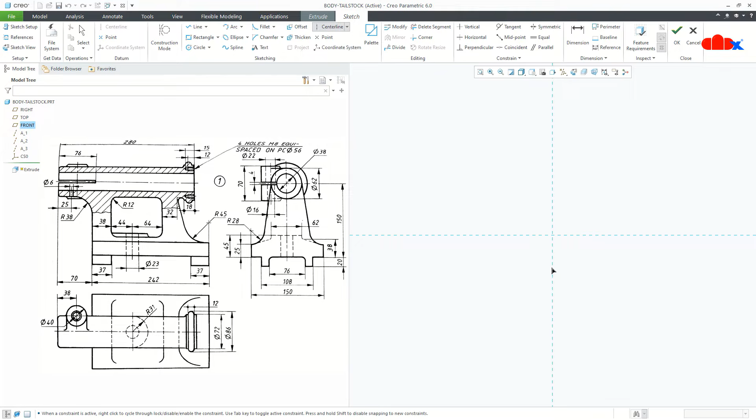To design this part, I will use add material and remove material features together at a time. I will start with this face, and for this go to extrude onto the front datum plane, normal. Now draw a center line just like this, then a line, make it symmetric. This is 76. Draw another line, starting from here, this side, this side, this side, then this side, then this side. Now this is 20.

From here till here till here, this is 108. Similarly from here till here till here, this is 150, and this is 25. Now draw another line like this and this. From here till here, this is 38, and from here till here till here, this is 62. Now draw one circle somewhere here. This is 62. From here till here, this is 150.

Now draw one line. From here, make it tangent and connect it here. Add one round from here till here. Make this point and this point vertical. This is 28. Draw another line from here till this point. Make these two segments parallel. Now select this line and make it construction. Go to delete segment, delete this segment and this segment.

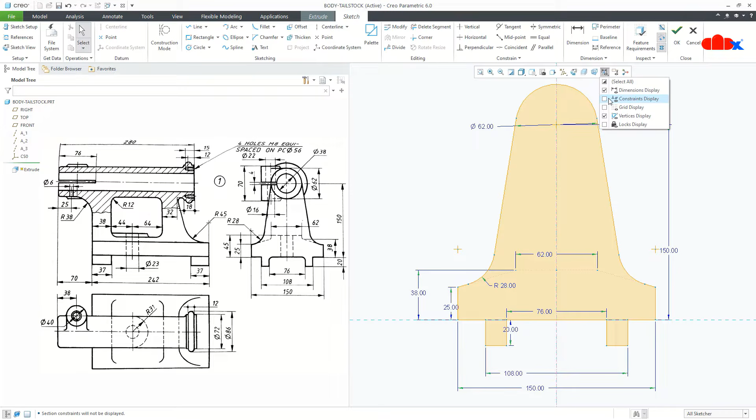Now mirror this half portion with this reference. To see it clearly, uncheck the constraint display. Now you can see it clearly. Say OK. Flip it. The total length is 242. Say OK.

The next feature is this cut. Go to extrude, switch on the datum plane, select this datum plane, normal. Go to references, select the top edge, then this edge and this side edge as references. Draw one arc from this point, this side, just like this. Then one line, starting from here, let it be tangent and connect it here. Then close it just like this.

Now draw one center line here, then a sketch point somewhere here, then go for dimension. From this point till this end, one dimension, and from this point till this end. This is 62 and this is 38 plus 44 plus 64 plus 32. Go to delete segment and delete this segment. Now this is 45.

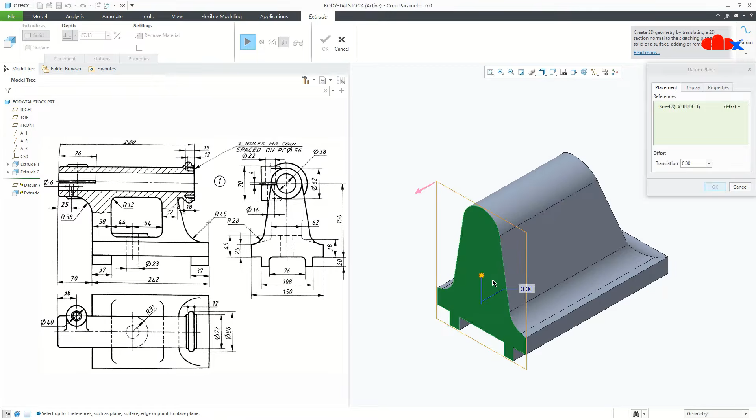The next feature is this center cut, and for this go to extrude, create a new datum plane, select this surface, drag it this side up to 38. So it is this value. Now you can see that your sketching plane is 38 away from the surface. Project this and this curve. This also you project.

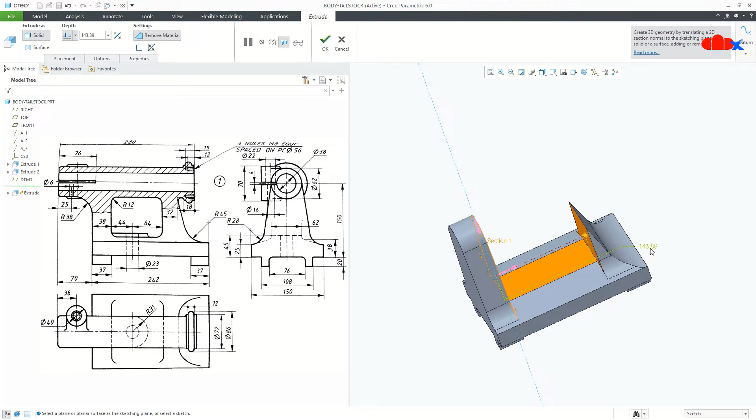Draw one line from this point, this side, and then this side. One more time, from this point, this side and this side. Now the dimension: from here till here, this is 62. Go to delete segment and remove this side segment and this side segment. Now it is a closed sketch. Say OK. Flip the direction. This is 44 plus 64. Now I will just add a center axis.

So the next feature is this feature, and for this I will go to revolve. I will switch on the datum plane and select this datum plane. Take the reference of this center line.

Draw a center line, then a rectangle, start from this side, go till this end, then again go for reference and select this top edge. Now using this option, move this line to this reference.

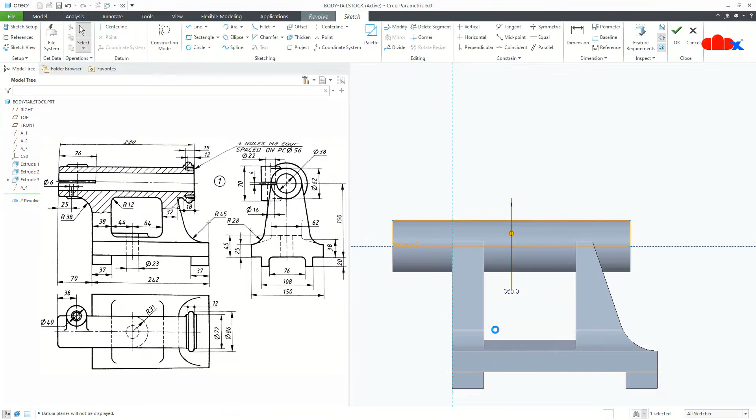Now this is 70 and this is 280. Say OK, and OK.

One more time revolve, placement, define, use previous to select the previous sketching plane. Go to reference, select the center line, then this edge and this side edge.

Now draw the center line, then line, start from here, this side, one circle here.

Now this is 18, this is 12, and this will be 9. Draw a line from here this side, and then from here this side, and from here this side.

Now go for delete segment, remove this segment and this segment. Now from here till here, this is 72 and this is 86.

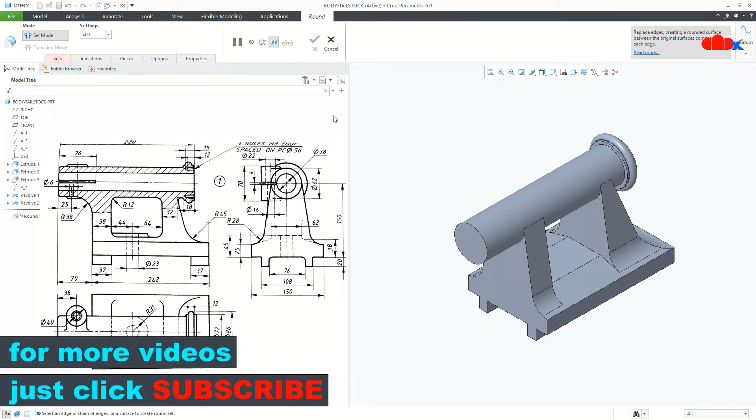So this is done. Now the round, select this edge, this is 38 and say OK.

One more round, this one and this one, this is 12, select this and this. Similarly this side.

So the next feature will be this feature, which is this one, here also. So go to extrude, again create a new datum plane.

From the bottom, this side it is 45, so now you can see the sketching plane.

Now draw the reference this side, draw a center line here, then the circle somewhere here.

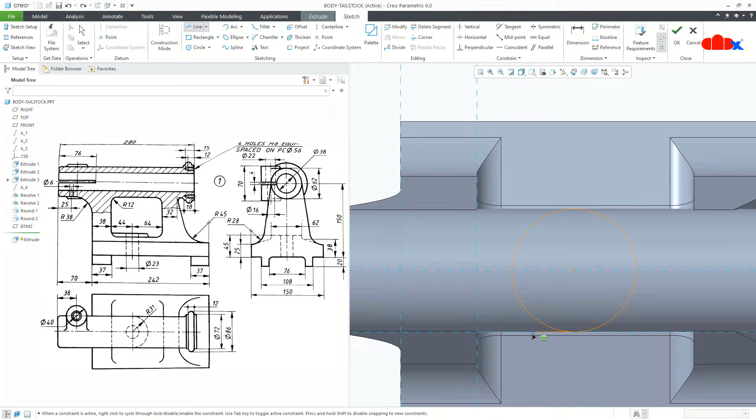Just mirror it. Now go for delete segment, now this is 44.

Now the sketch is not closed, and that is why it is showing the red mark. So use corner and select this line with this and this with this line. So now the sketch is closed, say OK.

Flip the direction and say to next. See the preview, say OK.

Now the next feature is this feature, which is here and here, and for this create a datum plane. From here, press and hold Ctrl key and select the center line, make it parallel.

Now go to extrude. So normal, draw a circle somewhere here. So this is 38 and this is 40.

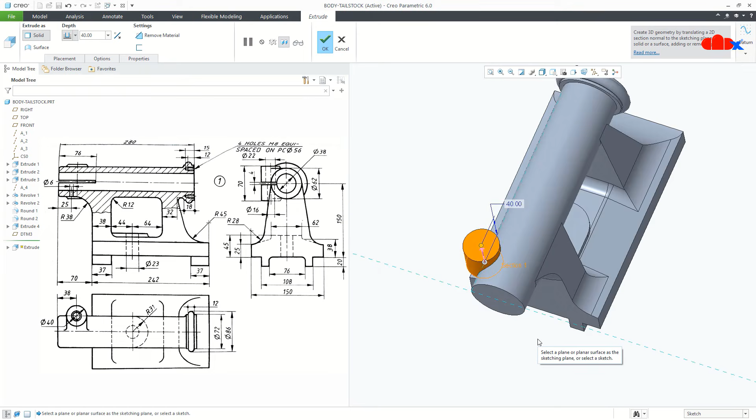Now this is 70. Now make it symmetry and say OK.

One more time extrude, placement, define, use previous, normal. Go to reference and select this circle as a reference. Now draw the line from here this side and from here till here and then this side.

Close it. Say OK. Uncheck it. Make it symmetry and this will be 62. Say OK.

Now the next feature is this cut, which is this one, and for this go to extrude, select this surface, normal, go to reference, select this circle. Now draw the circle.

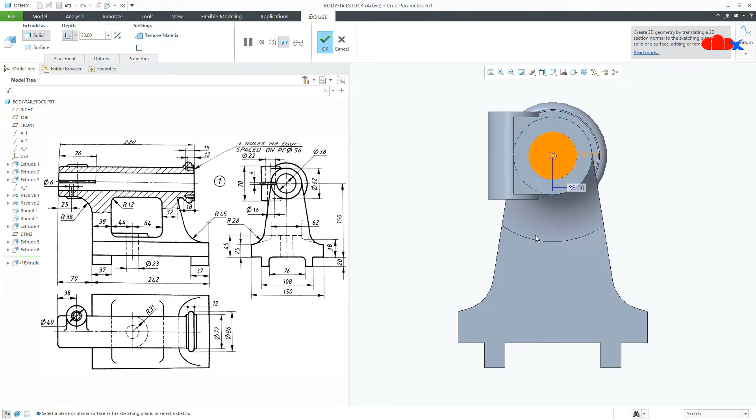Which is dia 38, say OK. Flip the direction and make it through all. Say OK.

So one more cut on the same plane. Go to reference, select this edge, draw the center line. Now draw the rectangle from here, this side.

Now this is 4. Say OK. Flip the direction. Remove material.

Now this is 76. And say OK.

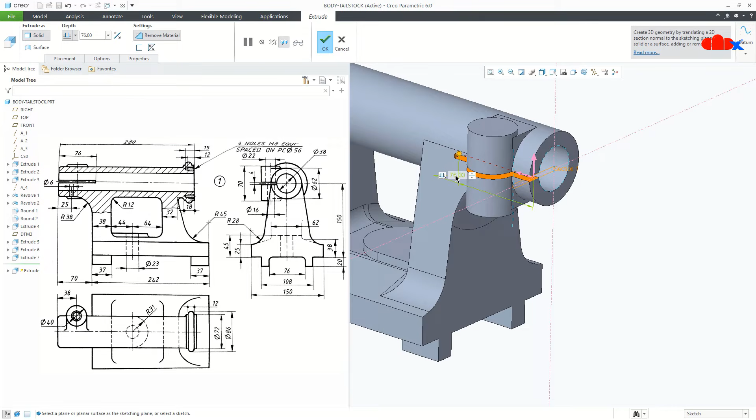Now the next feature is this feature. So go to hole, switch on your center axis, select this surface, press and hold Control key and select this axis. Now this dia is 22, which is this one.

But if you see this hole, this is not constant. The bottom side is 16 and top side is 22, 16 and 22. So for this kind of hole, go to sketch, sketcher, draw a center line, a vertical center line, then draw the rough hole profile.

So this is 22. Draw the line just like this, a rough profile of that hole.

This bottom will be 16 and this is 70 and this will be 35. Say OK.

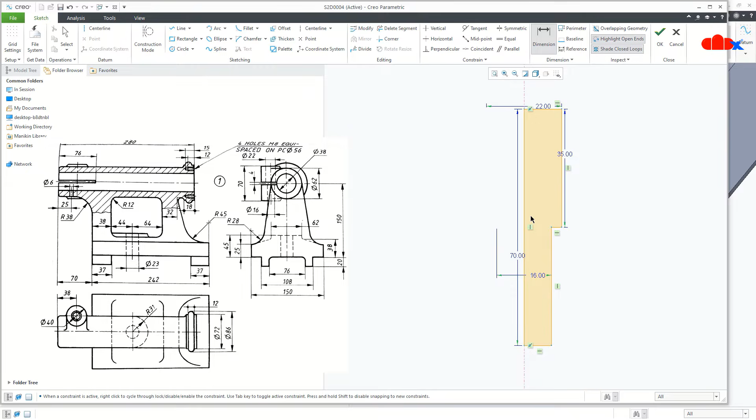So now you can see this hole. You can clearly see the small dia and big dia, which is 22 and 16. Now you say OK.

Now the next feature is this hole, and for this go to hole, switch on the datum plane, select this datum plane, now drag this handle to this surface and this handle to the center plane.

So this is 0 and this is 25. Make it minus 25.

Now the diameter is 6, and you make it to next, and say OK. So this hole is done.

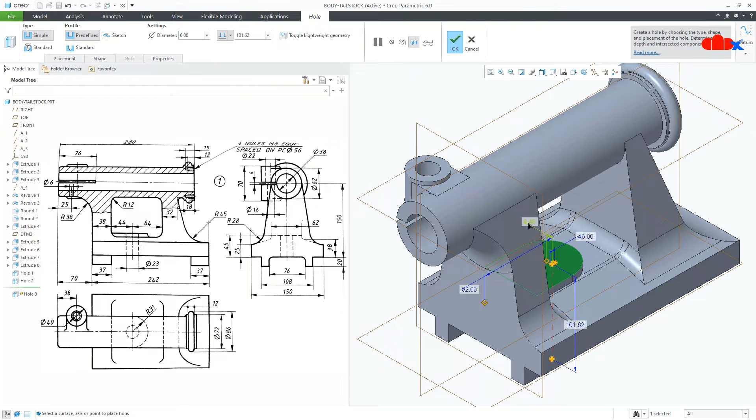Now the next feature is this hole, and for this once again go to hole, select this surface, drag this handle to this surface. So this is 38 plus 44, and this handle to this mid plane. This will be 0, and this is diameter 23. Make it to next and say OK.

Now the next feature is the side holes, screw holes. So go to hole, select this surface, switch on your axis and datum plane. Now drag this handle to this center axis, and this drag handle to the mid plane, so to this plane. Now go to placement and change it to diameter.

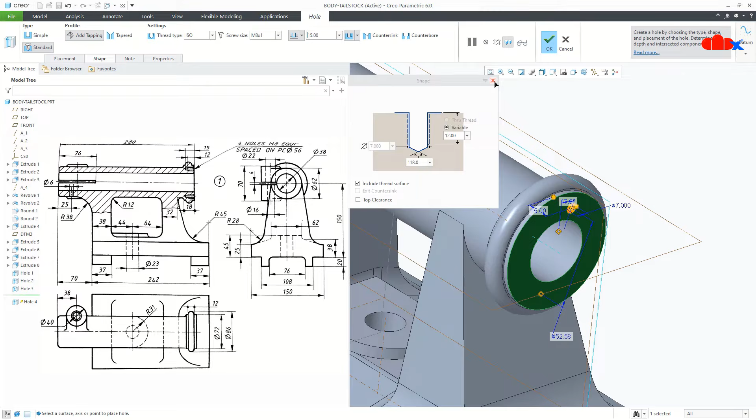So this is M8 standard hole. So go to standard, and from here select ISO, and from here you select M8. Now go to the shape. Here you have the thread length which is 12, and here you have the hole length which is 15. Now this angle will be 0, and this is the PCD, so this is 56.

So your hole is done. Now go for pattern, axis pattern, select this center axis, 4 items with 360 degrees, say OK.

Now the round, so this edge and this edge, this is 12. One more round to this edge, this is 6. Another round to this edge, this is 5.

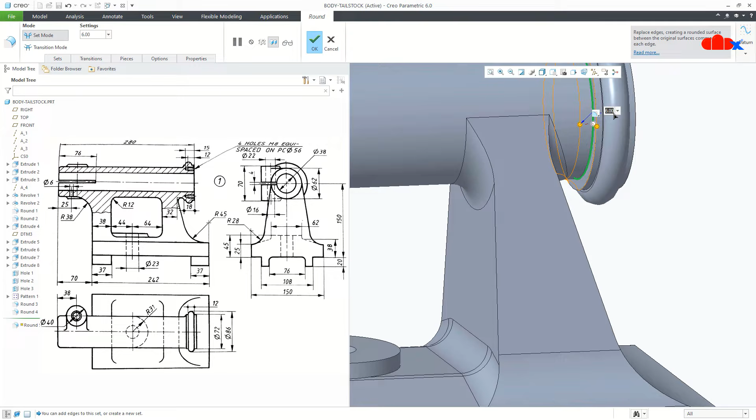One more round to this edge, this edge, this edge, and this edge. This is 6. Then one more round here, this is 3. Say OK.

Then the last round, which is this one, and this one. This is one, and your part is done.

Now go to view, sections, planar, switch on your datum planes and select this datum plane. Go to properties, make it A, and say OK. So you got section A.

Similarly, planar, select this surface, drag this side. This is 38 plus 44, 82. Make it B and say OK.

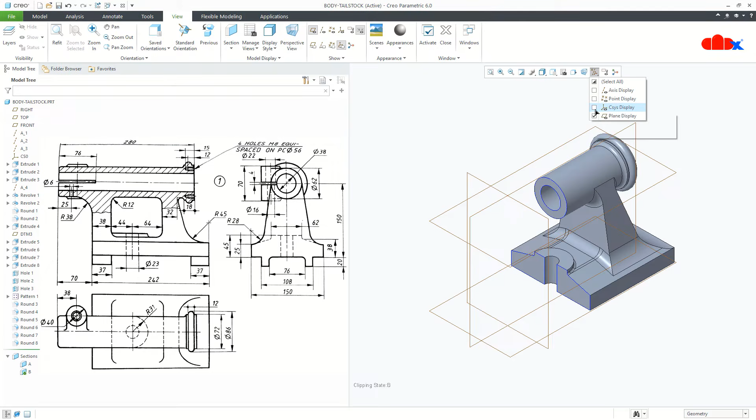So now you have section A and B. If I activate section A and make it normal, it looks like this. And if I activate B and make it normal, it looks like this. So this area is exactly similar to this.

And your part is done. So the first part is done. Now the second part, which is the feather, comes somewhere here.

Now this part has two functions here. The first function is to guide this barrel to move forward and backward, and the second function is to stop this barrel rotating on its own axis. So this is your second part, the feather. Let's do this part.

And for this, first you go to new, part, solid, assign the name, uncheck the default template, and select a metric template. So this is my metric template. In your case, you can go with this template. So I'll go with this template.

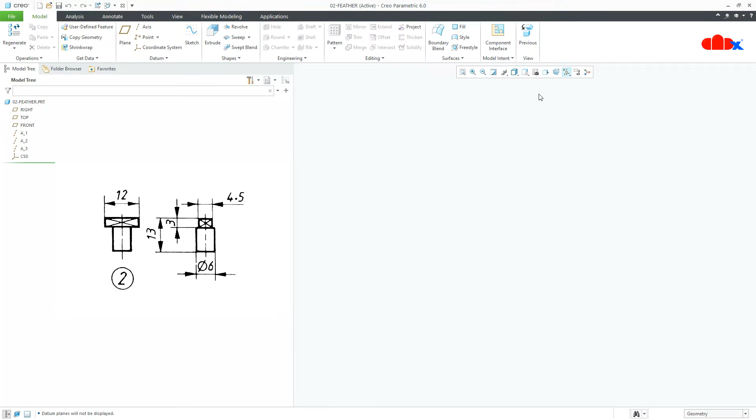Now to start this part, go to extrude onto the front datum plane, normal. Now draw a center rectangle, just like this. This is 3, and this is 12. Say OK.

Make it symmetry, and this is 4.5, and say OK.

Now one more time extrude onto the bottom surface. Just right click to shift the surface. Go to reference, switch on the datum plane, and select this mid plane.

Now draw a circle, just like this. The diameter of the circle is 6. Say OK.

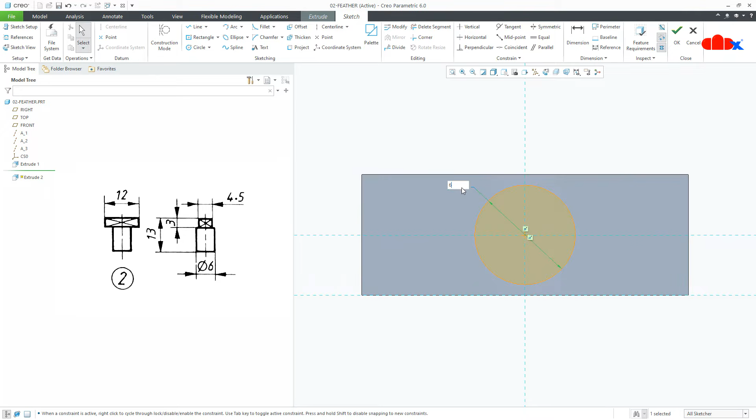Now the height is 13 from the top surface. So for that, go to 2 selected and then create a datum plane. From this top surface, drag it down till 13, and say OK. Now click here and say OK.

So now if you edit this feature, you can see that this 13 is from the top surface, and this part is done. So the second part is done.

Now the third part, and the third part is the barrel, which is this part. So these parts hold the dead center, and this part moves forward and backward using this part, which is the screw spindle. So this is your third part, the barrel. Let's do this part.

And to do this, first you go to new, part, solid, assign the name, uncheck the default template, and select a metric template. So this is my metric template. In your case, you can go with this template. So I'll go with this template.

Now to start this part, go to revolve onto the front datum plane, normal, draw a datum center line, then a rectangle, just like this. Now this is 265, and this is 38. Say OK and OK.

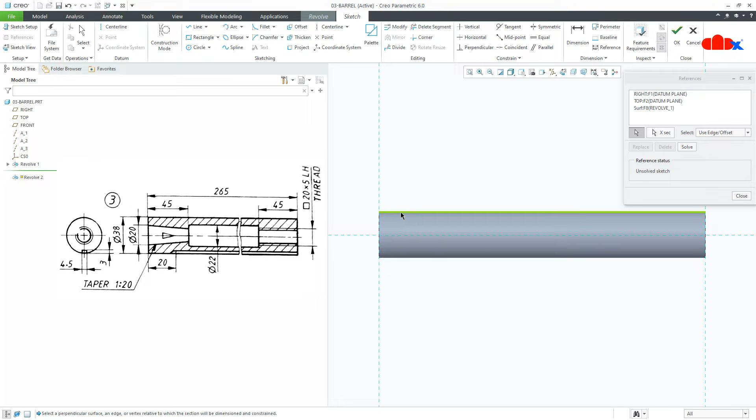One more time revolve, same plane, say use previous, normal. Go for reference, select this reference, then a datum center line, just like this. Now draw the sketch, so start from here, just like this.

Now close the sketch. Now the dimension, so this is 20, and from here till here this is 45.

This is 22, this you take 15, and from here till here this is 45.

Now this taper angle, so this is given here 1:20. So to calculate this value, just divide 45 by 20. So you will get the value. That value you minus from dia 20.

So this value will be 20 minus 2.25, so 17.75. Say OK, and say OK.

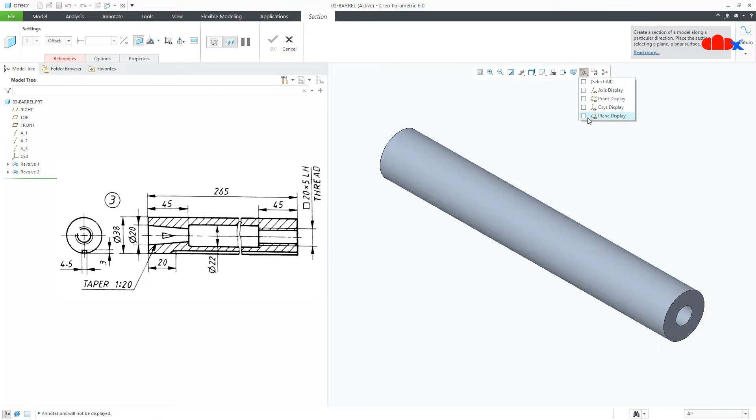Now create a section view. Go to view, section, switch on your datum plane, select this plane, rename it to section A, and say OK.

Now the next feature is this keyway, and for this go to extrude, switch on your datum plane, select this plane, now go to reference, select this reference and this reference.

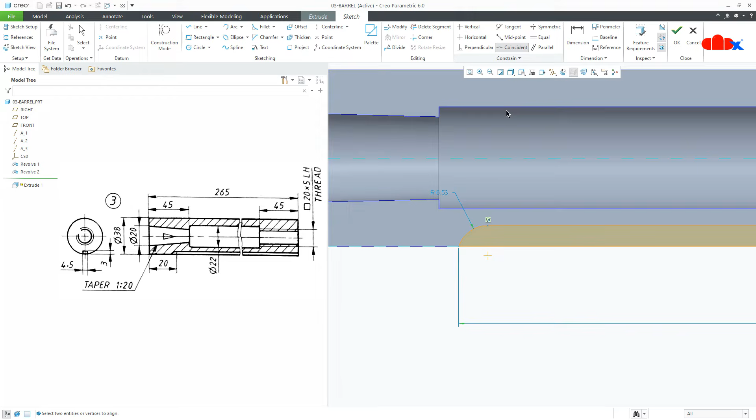Now draw the sketch. So start from here, go like this, come down, then this side, then an arc from here to this. Go for delete segment, delete this segment, then move this point to this line.

Now this gap is 3, and from here till here it is 20. Say OK. Now this is 4.5. Make it symmetry, remove material, and say OK.

Now the next feature is this thread. This is a square thread, 20 into pitch 5 LH. So go to helical sweep, reference, define, switch on your datum plane, and select this datum plane. Sketch, normal.

Now go to reference, select this reference. Draw center line, then draw the thread profile. Little extra this side and little extra this side, just like this. The value is 5 both the sides.

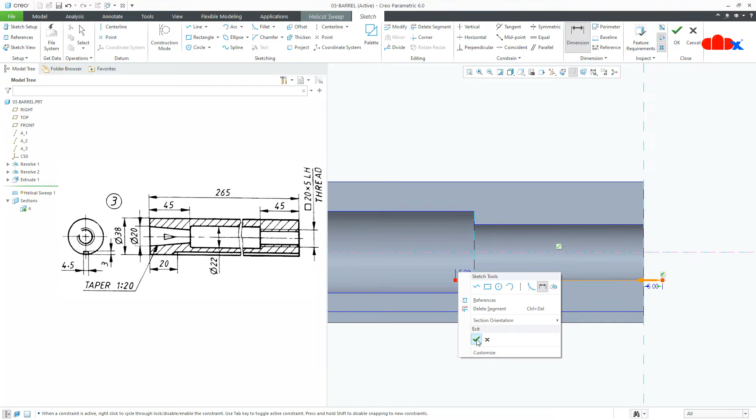And say OK. Now go to section and draw one rectangle, just like this. This value will be 2.5. Say OK. So now you are getting a thread. Go to left hand side, remove material, and the pitch is 5. Say OK, and your thread is done.

And this part is done. So the third part is done. Now the fourth part, which is screw spindle, which is this part. This part rotates using this hand wheel, and this part is having square thread here through which it moves this barrel forward and backward. So this is your fourth part, the screw spindle. So let's do this part.

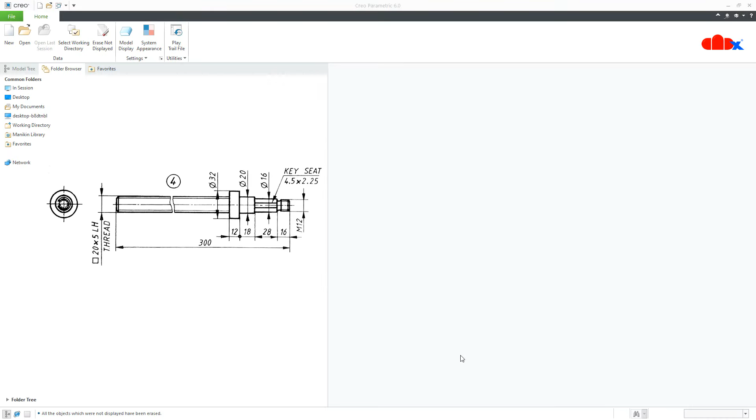And to do this, first you go to new, part, solid, assign the name, uncheck the default template and select a metric template. So this is my metric template. In your case, you can go with this template. So I'll go with this template.

Now to create this part, go to revolve onto the front datum plane, normal, draw a datum center line, then rectangle, just like this. So this is 300 minus 74, and this is 20. Say OK, and OK.

Now the next feature is the square thread. So go for helical sweep, reference, define, select this datum plane, sketch, normal, now add a center line, then reference here and here.

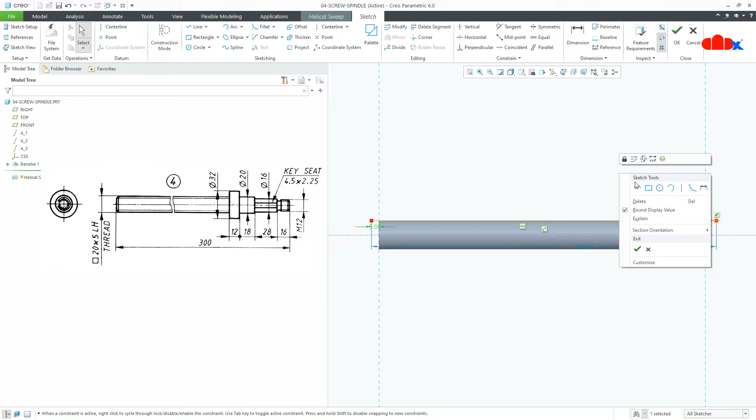Now draw the thread profile, start from somewhere here till here, little extra both sides. So this you take 5, and this side also you take 5. Say OK. Now go for section.

Draw a rectangle somewhere here, and this will be 2.5. Say OK, remove material, the pitch value is 5, and say OK. So square thread is done.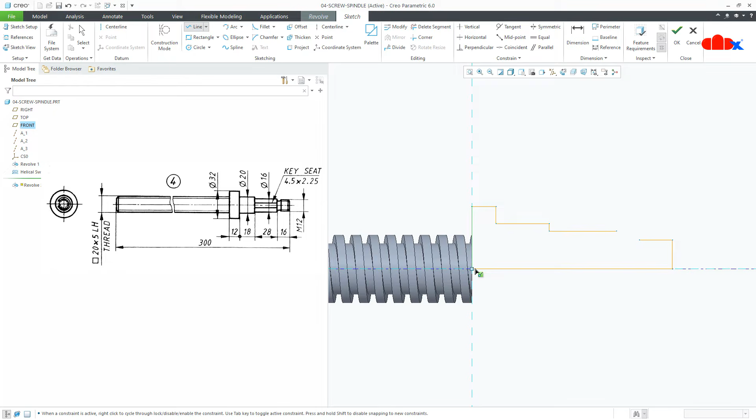Now one more time revolve, select this datum plane, normal, draw a datum center line, then sketch, start from here, just draw a rough sketch, just like this, close this, now add one arc, roughly, just like this.

Then the dimension. So this is 32, this is 20, this is 16, this is 12, this is also 12, this is 18.

Now from here till here this is 16, and this is 28. Now this you consider 16, and this is 3. Say OK. And OK.

Now the next feature is this keyway, and for this go to extrude, select this surface, normal, go to reference, select this reference, draw a center line, a vertical center line, and then a horizontal center line.

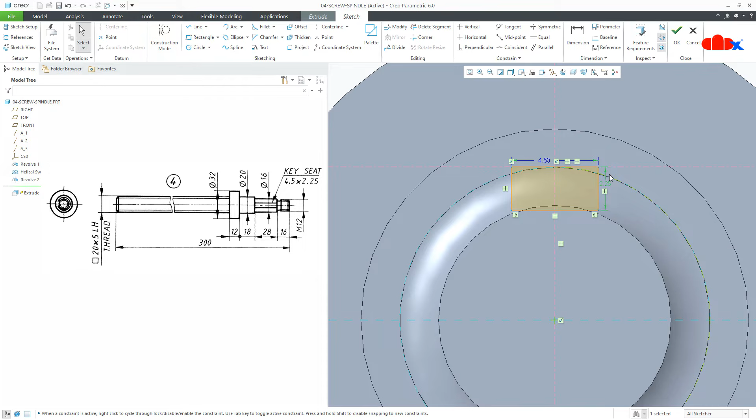Draw a rectangle, let it be symmetry. So this is 4.5, and this is 2.25. Say OK.

Go to remove material, to selected, and select this surface. OK. Now this portion is the threaded portion. So go to cosmetic thread, select this surface. Now the depth. So this is the starting point. So I'll start from here and I'll go to selected and the thread will be till here. Go to standard, select ISO and from here select M12. And say OK.

Now the last feature is the chamfer. So select this edge and this edge. The value will be 1. Say OK. And this part is done. So the fourth part is done.

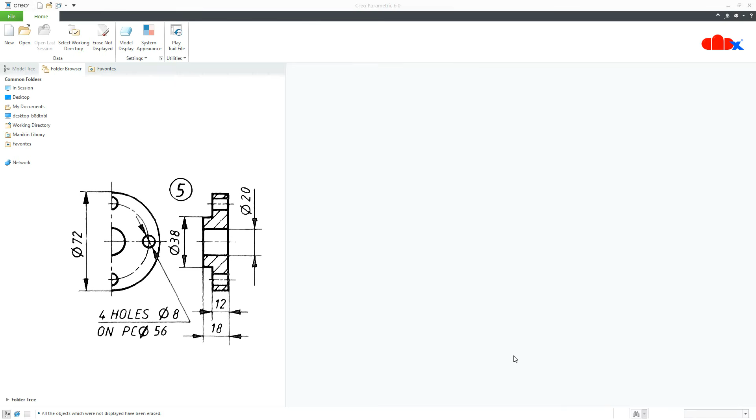Now the fifth part, which is flange, which is this part. So this part supports this spindle. So this is your fifth part, the flange. So let's do this part now. And to do this, first you go to new, part, solid, assign the name, uncheck the default template and select a metric template. So this is my metric template. In your case, you can go with this template. So I'll go with this template.

Now to create this part, go to revolve onto the front datum plane, normal, draw the datum center line, just like this, then draw the sketch, draw one line first. Now this is 72, then add a rough sketch, just like this. Go for delete segment and delete this segment.

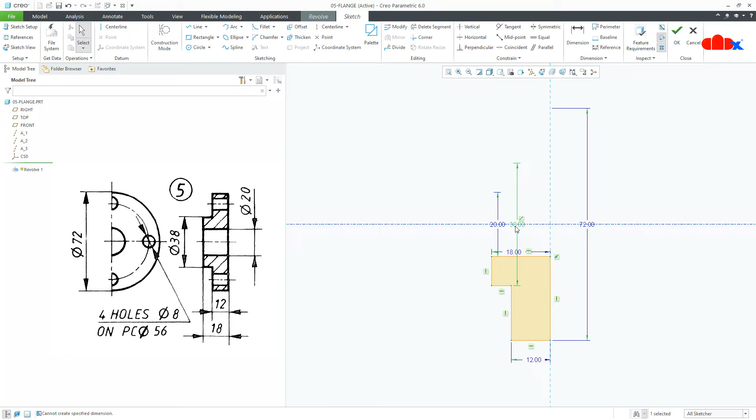Now the dimension. So this is 18 and this is 12. Now this is 20 and this is 38. Say OK and OK.

Now the next feature is these holes with dia 8. So go to hole, select this surface, switch on your datum planes and datum axis. Drag this handle to this axis and this handle to this plane. Go to placement and change it to diameter. Now this angle will be 0 and this is the PCD, which is 56. Now the dia of hole is 8 and the depth is through next. Say OK and your hole is done.

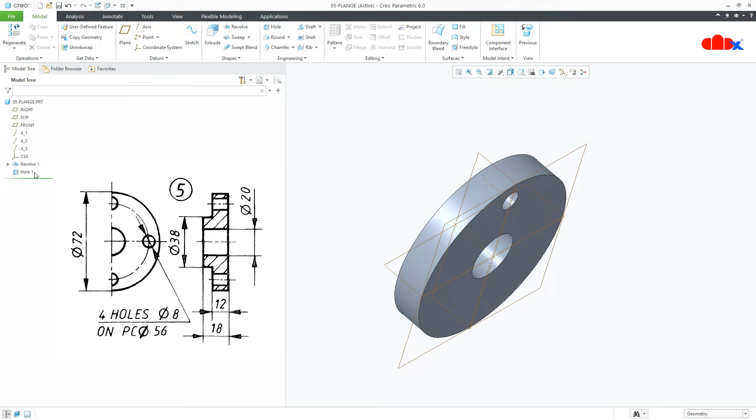Now select the hole, go for pattern, go for axis pattern, select the center axis 360 degree and say OK and your part is done. Now add a section view. So go to view, section, select this datum plane. Now rename it to section A and say OK. And this part is done. So the fifth part is done.

Now the sixth part, which is screw, which comes somewhere here. So the screw is used to fix this flange to this tailstock body. So this is your screw. So let's create this part. And to do this, first you go to new, part, solid, assign the name, uncheck the default template and select a metric template. So this is my metric template. So in your case, you can go with this template. So I'll go with this template.

Now to create this part, go to revolve onto the front datum plane, normal, draw a datum center line, just like this. Then the sketch, start from here, like this. Now this dimension will be 16. Then arc from here, this side, just like this. Now this will be 8.5. Then draw the sketch from here, this side and this side. Delete segment, delete this segment and this segment.

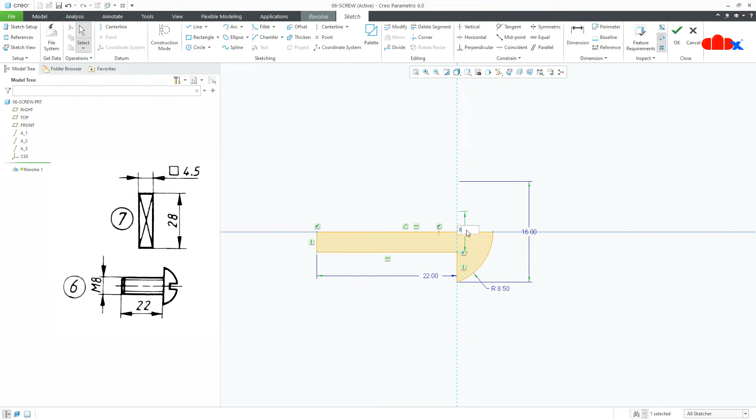Now this is 22 and this will be 8. Say OK and OK.

Now go to extrude onto the front datum plane, draw a center line, then go for reference, select this as a reference, then one more center line, then draw one rectangle, make it symmetric. Now this gap is 1.5 and this is 3.5. Say OK. Remove material, through next. Now the second direction, here also through next and say OK.

Now the last feature is chamfer. So go to chamfer, select this edge, the value is 1 and say OK. Next feature is the thread. So go to engineering, cosmetic thread and select this surface. Then go to standard and from here you select M8. Now the depth. So this is the starting surface. So my thread will start from here and go to up to selected and select this surface. Say OK. And this part is done. Now this part is done.

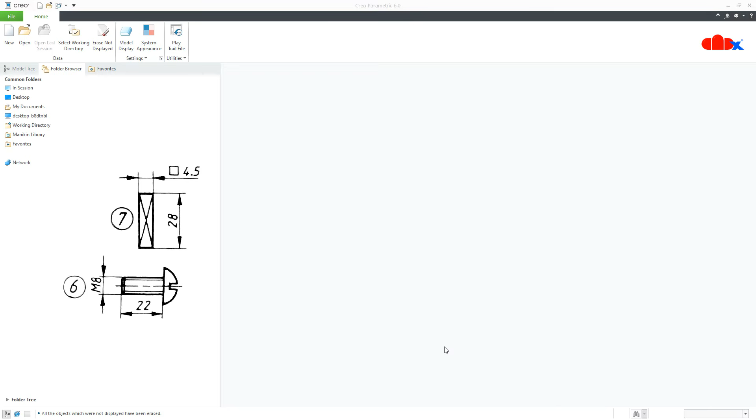Now the next part, which is feather key, which comes somewhere here. So the purpose of feather key is to engage this spindle with this hand wheel. So this is your feather key. So let's do this part. And to do this, first you go to New, Part, Solid, assign the name, uncheck the default template and select a metric template. So this is my metric template. You can go with this template. So I'll go with this template.

Now to create this part, go to Extrude, onto the top datum plane, Normal. Now draw a center rectangle, make both sides equal. Now this is 4.5. Say OK. Now the height is 28. Make it symmetry and say OK. And this part is done. So this part is done.

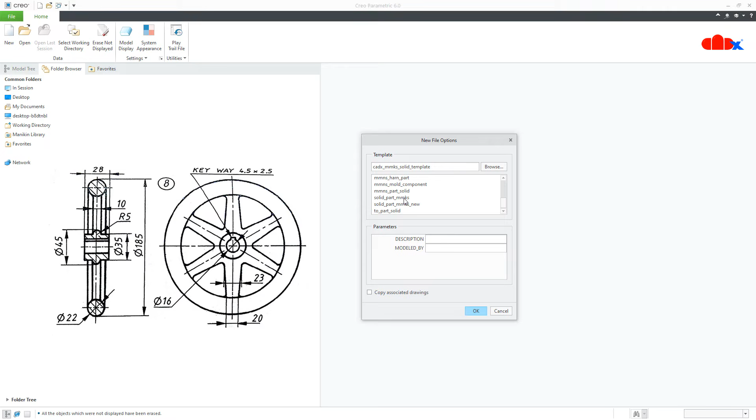Now the next part, which is hand wheel, which is this part. So the hand wheel is used to rotate this spindle, which transfers its rotational motion to the sliding motion of the barrel. So this is your hand wheel. So let's do this part now. And to do this, first you go to New, Part, Solid, assign the name, uncheck the default template and select a metric template. So this is my metric template. So in your case, you can go with this template. So I'll go with this template.

Now to create this part, first you go for revolve, onto the right datum plane, Normal, draw a datum center line, then a sketch center line, then draw one circle somewhere here. The dia of circle is 22. And from here till here, this is 185. Then draw one rectangle somewhere here. Now this is 35 and this is 28. Say OK and OK.

Now the next feature is this feature, and for this first I will draw one sketch onto the front datum plane. Draw one center line just like this, then two circles. One is smaller circle like this and another one is bigger circle like this. So this is 163. So this circle should pass in the center of the wheel, and this is 45. Then draw one line, start from here, taper till here, mirror this line, then draw one sketch point somewhere here and here, and here and here.

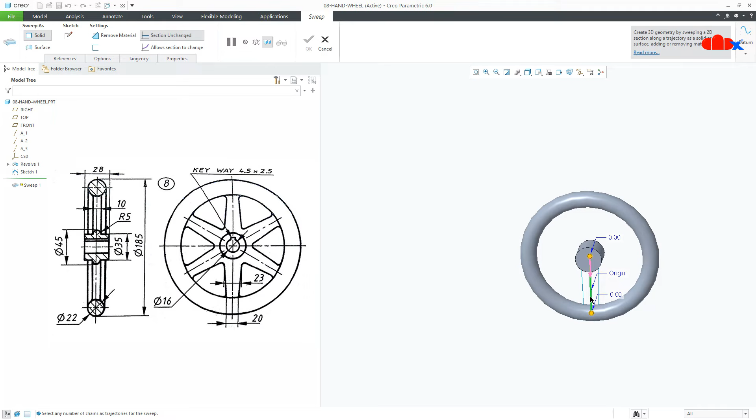Now I'll go with sweep, multiple path sweep. So I'll select the center path, then this path and this path. Then go for sketch, but always select this option, and go for sketch. Normal. Now draw the sketch. So I will draw one circle just like this and like this. Both the circles should be equal.

Now draw one line from the tangent of this to this and this to this. Now go to delete segment and delete these two segments. Now this is 5 and say OK. So now you are getting a multi-path sweep.

Now pattern this feature. Go for axis pattern. Switch on the axis and select this center axis. Total item 6 onto 360 degree and say OK.

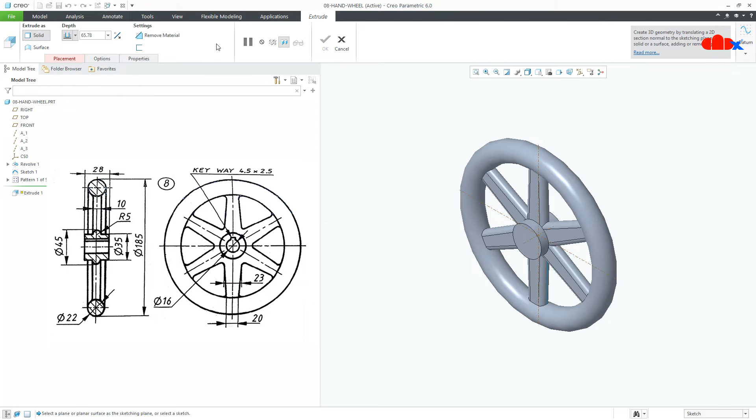Now go for extrude. Select this surface. Draw one circle. One center line. Now draw a line from here this side, then this side and this side. Make it symmetry, this point and this point with this reference. So this is 4.5 and this is 16. And from here till here this is 10.5.

Go for delete segment, delete this segment and say OK. Flip the direction and it is to next and say OK.

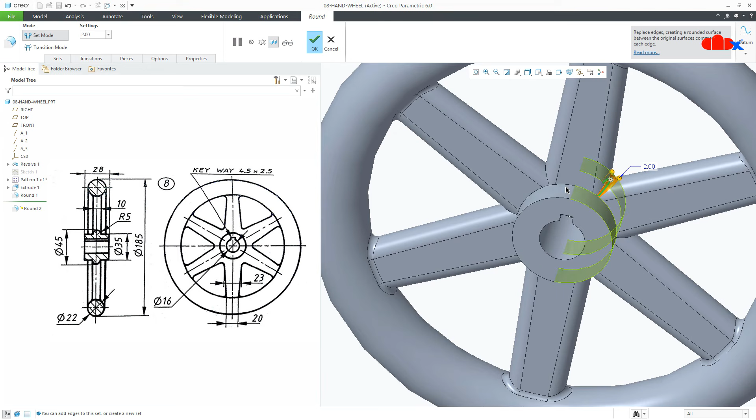Now a couple of rounds. So go to round. Select this edge, this is 2, then press and hold Ctrl key and select all these edges and say OK. Similarly, one more round to this edge, press and hold Ctrl key and select all similar edges. This is one. One more time round. Select this edge and this edge. Say OK.

Now let's create a section view. So go to view, section, select top datum plane, rename it to section A and say OK. So now you can see the section. So this is how the section will look. And this part is done. So this part is done.

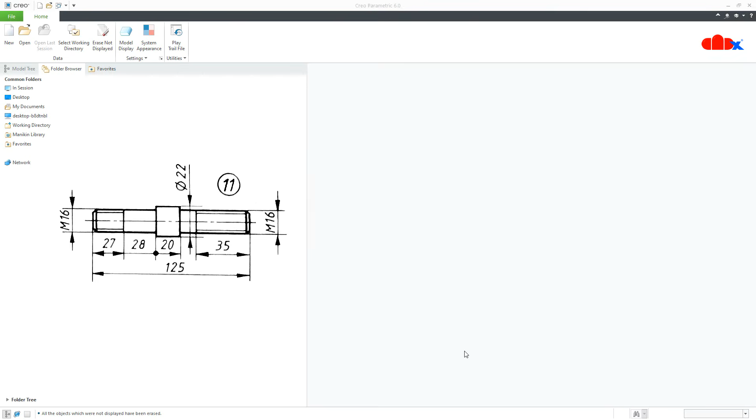Now the next part, which is stud, which comes somewhere here. So the stud, with the help of this handle, tightens the jaw of this body so that it can fix this barrel at any position. So this is your stud. So let's do this part. And to do this, first you go to new, part, solid, assign the name, uncheck the default template and select a metric template. So this is my metric template. You can go with this template. So I'll go with this template.

Now to create this part, go to revolve onto the front datum plane, normal, draw a datum center line just like this, then the sketch, start from here, this side, come down, go this side. Draw a rough sketch just like this.

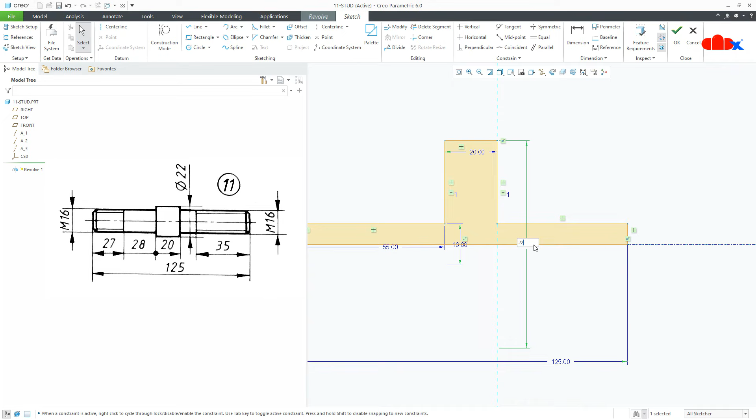Now the dimension. So this is 20, and this is 55, and from here till here this is 125. Now this is 16 and this is 22. Say OK and OK.

Now this part is having standard thread M16. So for this, go to Engineering, Cosmetic Thread, select this surface. Select Standard, and from here you select M16. Now the depth, so starting surface, so this will be my starting surface and the depth is 27.

And say OK. Similarly, one more time, go to Cosmetic Thread, this time you select this surface, Standard, ISO, M16. Now the depth, so this is starting surface, so this will be my starting surface. Now this depth is 35 and say OK.

Now the chamfer, so select this edge and this edge, and this part is done. So the stud is done. Now the next part is this handle. So this is your handle. So let's do this now.

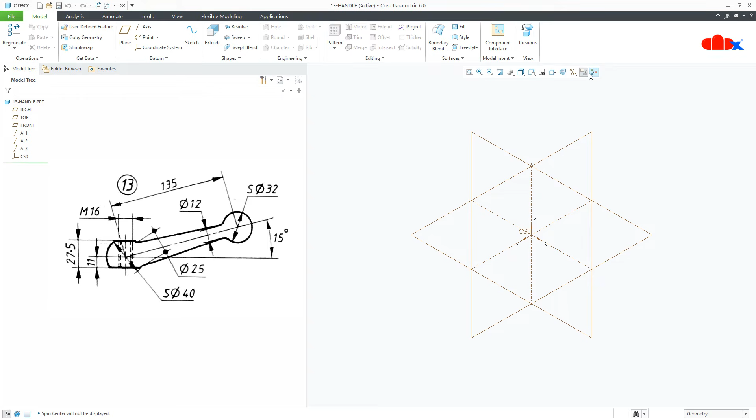Now to create this part, first you go to Revolve, onto the front datum plane, normal. Now draw a datum center line, just like this, then a circle somewhere here. The circle dia is 40. Then draw one line from here this side and from here this side. Now go for delete segment, delete this segment.

Now from here till here, this is 11, and from here till here, this is 27.5. Now close the sketch and say OK. One more time revolve onto this datum plane. Draw again a datum center line. From here, this side, the angle is 15 degree.

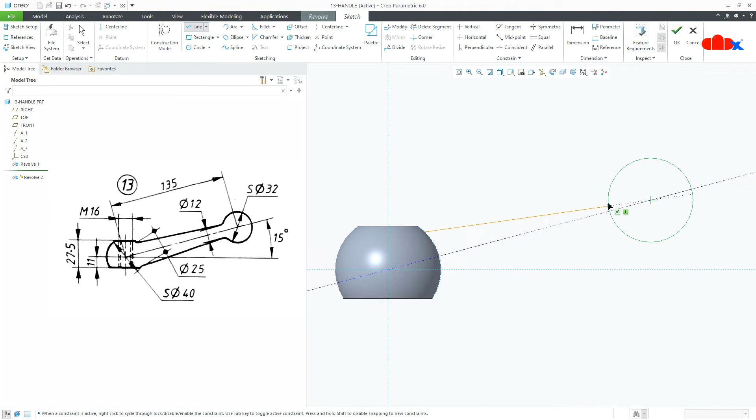Now draw a circle somewhere here. This dia is 32. Then take a reference. Draw a line from here till here. Now this is 25 and this is 12. Now draw a normal line like this and like this. Then go to delete segment, delete this segment and this segment.

Now the gap from here till here, this is 135. Say OK. And OK. Now the hole, so this is a standard hole M16. So go to hole, switch on your center axis, then select this surface, press and hold Ctrl key and select this axis. Now select standard, ISO and M16. Depth is to next and say OK.

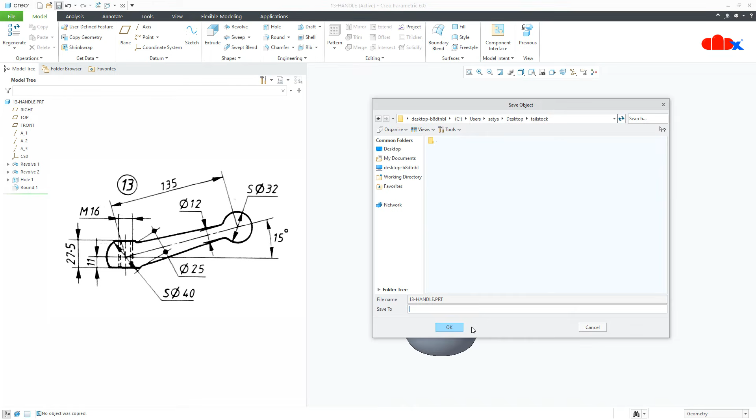Now the round, so go to round, select this edge and this edge. Now the value is 2 and say OK. And this part is done. So the handle is done. Now the next part is clamping plate, which is this plate. So this plate is used to hold this tailstock onto the bed of lathe assembly. So this is your clamping plate. So let's do this part now.

And to do this, first you go to new, part, solid, assign the name, uncheck the default template and select a metric template. So this is my metric template. You can go with this template. So I'll go with this template.

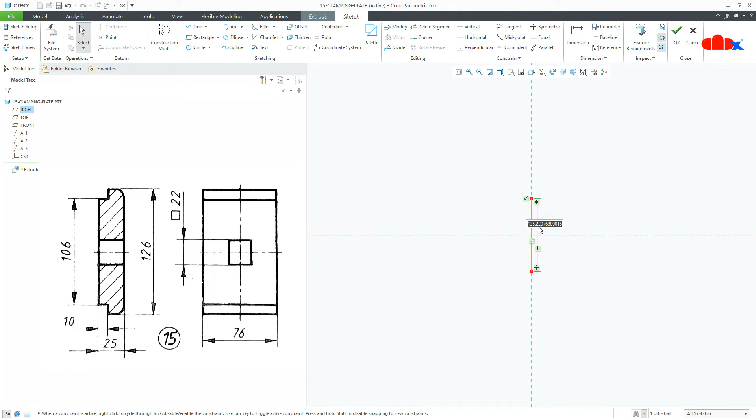Now to start this part, go to extrude, onto the right datum plane, normal, draw a center line, just like this, then a line, start from here, make it symmetry. Now this is 126, then draw the rough sketch. Start from here, this side, this side, this side and this side. Mirror these lines using this reference.

Now the dimension, so this is 106, this is 10, and from here till here this is 25. So first you delete this equal constraint, and then from here till here this will be 25. Say OK. Now the total height is 76. Make it symmetry and say OK.

Now the next feature is this feature. So go to extrude, select this surface, normal, go for reference, select right reference. Now draw a center rectangle. Just like this. Now this is 22. Say OK. Flip the direction and make it to next. Say OK.

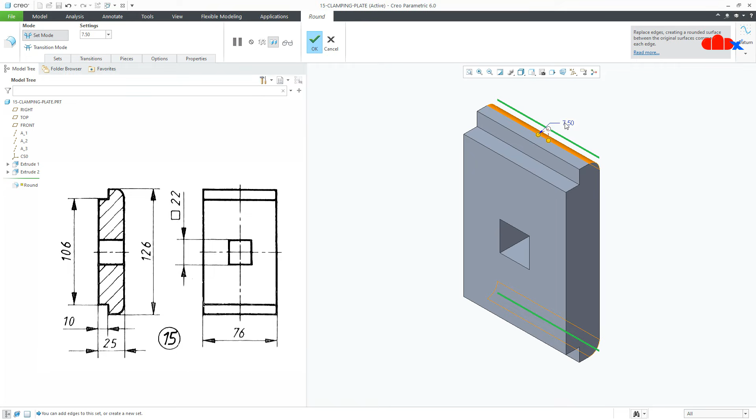Now the last feature is the round. So select this edge and this edge. The round value will be 7.5 and say OK. And this part is done. So the clamping plate is done. Now the next part is square head bolt, which is this part. So this part is used to fix the clamping plate. So this is your square head bolt. So let's do this part now.

And to do this, first you go to new, part, solid, assign the name, uncheck the default template and select a metric template. So this is my metric template. You can go with this template. So I'll go with this template.

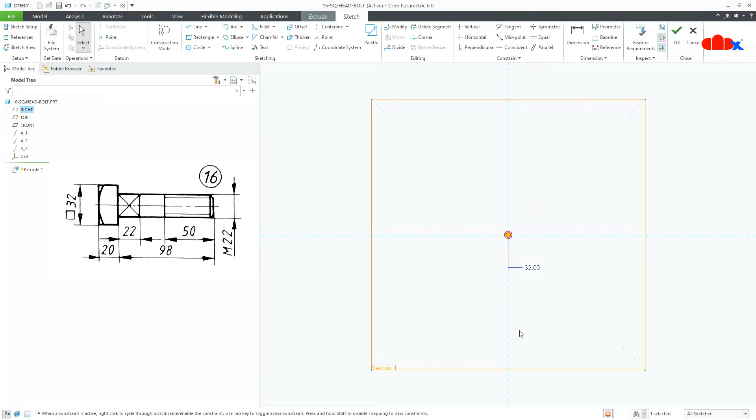So to create this part, first you go to extrude, onto the right datum plane, normal. Now draw a center rectangle, just like this. Now this is 32. Say OK. Now the thickness is 20 and say OK.

One more time extrude to this surface, normal, again center rectangle, just like this. This time it is 22. Say OK. Now this is also 22 and say OK.

Again extrude onto this surface, normal, draw a circle, just like this. Now go for reference, select this edge as a reference. Now make it tangent and say OK. Now this height is 98. Uncheck remove material and say OK.

Now the next feature is this chamfer, and for this go to revolve, switch on your datum plane, select this datum plane, normal. Now draw a datum center line. Then go for reference, draw the sketch, just like this.

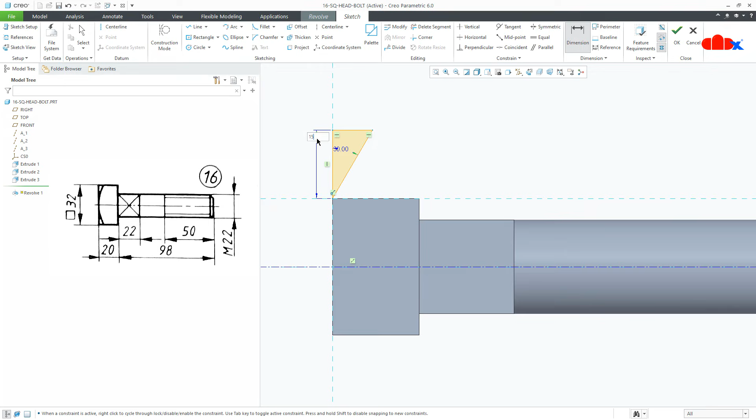Now this angle will be 30 degree and this you consider 15. Say OK. Remove material and say OK. So the chamfer is done.

Now the next feature is this thread, which is M22. So for this go to engineering, cosmetic thread and select this surface. Now go to standard, ISO, and from here you select M22. Now the depth, so this will be my starting surface. Now the depth is 50 and say OK.

Now the last feature is chamfer, so go to chamfer, select this edge, the value is 1 and say OK. So this part is done. Now the next part is dead center, which is this part. This part is used to hold the second end of the job, and this part will be inserted in this barrel. So this is your dead center. So let's do this part now.

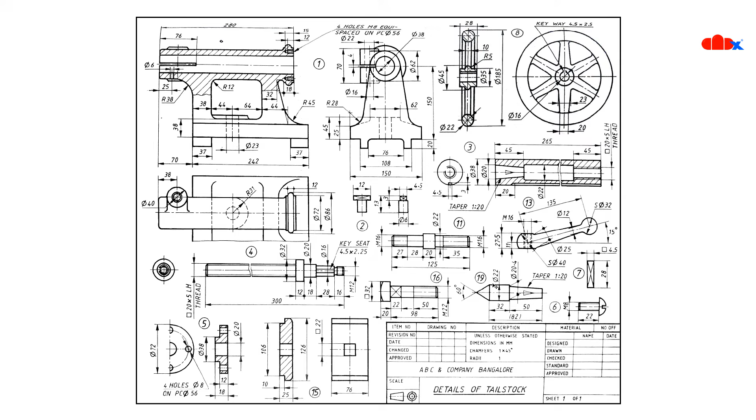And to do this, first you go to new, part, solid, assign the name, uncheck the default template and select a metric template. So this is my metric template. In your case, you can go with this template. So I'll go with this template.

Now to create this part, go to revolve, onto the front datum plane, normal, draw a datum center line, then draw the sketch. Start from here, just like this. Now this angle is 60 and this is 22. Now draw the half section, just like this.

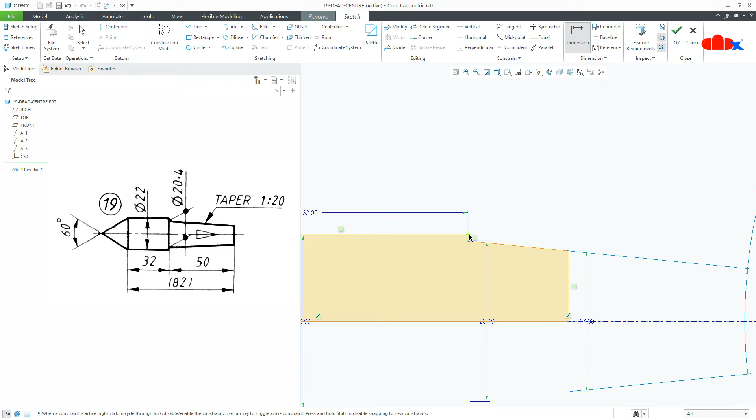Now the dimension, so this is 32 and this is 20.4 and this is 17.9, and from here till here this is 50. Now to calculate this 17.9, you need to understand this taper angle 1:20.

So to calculate 17.9, first you divide 50, which is this portion length, by 20. So you will get one value. That value you minus from 20.4, so you will get 17.9. If you divide 50 by 20, you will get 2.5, and if you minus 2.5 from 20.4, you will get 17.9. Now you say OK and OK, and the part is done.

So all the parts are done. Now at last we have some fasteners. We have three different sizes of nut and washer. These two are M12, then here you have M16, then M22. So let's do this part now.

And to do this, first you go to new, part, solid, assign the name, uncheck the default template and select a metric template. So this is my metric template. In your case, you can go with this template. So I'll go with this.

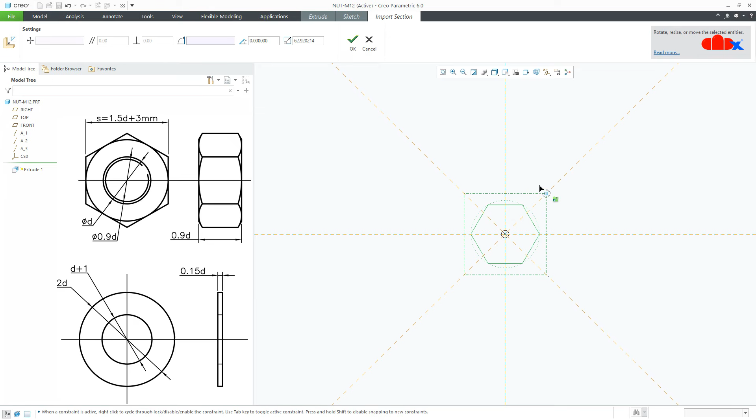Now to design these fasteners, I will follow these formulas. Here I am doing for M12, and the same procedure can be followed for the other two sizes. First you go to extrude, onto the front datum plane, normal, go to palette, 6-sided hexagon. Now move it here, rotate it, scale you make it 10 and say OK.

Now delete this dimension and take side to side dimension from here till here. For M12 it will be 21. Say OK. Now this thickness will be 10.8. Make it symmetry and say OK.

Now the chamfer, so go to revolve, select this datum plane, normal, go for reference, draw a datum center line, now draw the sketch, just like this.

This angle will be 30 degree and this I will consider 5. Say OK. Remove material and say OK. Mirror it to this datum plane.

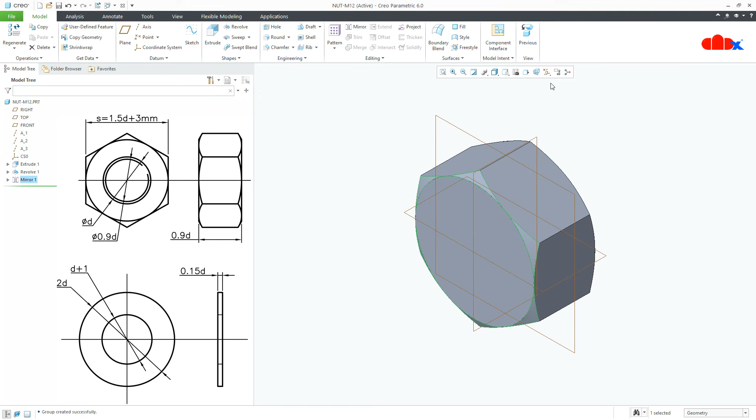Now the next feature is the hole. So switch on the datum axis. Now select this surface, press and hold Ctrl key and select this axis. Go to standard, select ISO, and then from here you select M12.

Depth you take to next and say OK. Now the last feature is chamfer. So go to chamfer, select this edge, the value is 1, and select this edge. Say OK and this part is done. So here this part is created for M12. Now the same procedure can be followed for the other two sizes.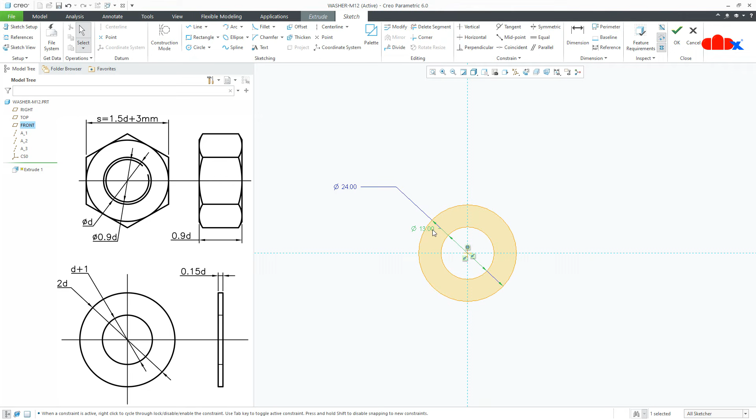So to create this part, go to extrude, onto the front datum plane, normal, draw the circle. So this will be 24. One more circle, and this will be 13. Say OK. Make it symmetric, and the round off value will be 2. Say OK, and this part is done. So all the parts are done.

Now let's move to the assembly, and for that first you go to New, Assembly, assign the name, uncheck the default template and select a metric template. So this is my metric template. In your case you can go with this template. So I'll go with this template.

Now there are two different approaches to do the assembly. The first one is the top-down assembly approach, where we create all the parts directly inside the assembly environment. Then the second approach is the bottom-up assembly approach, where we first create all the parts individually and then using assemble, we assemble all the parts inside the assembly environment. So here we will go with the bottom-up assembly approach.

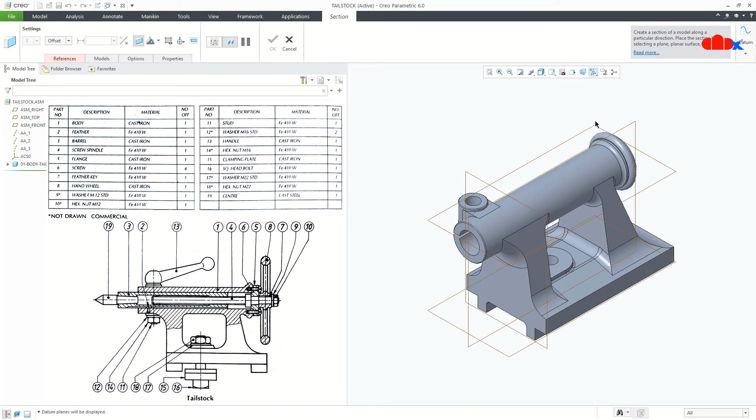So we will start with the first part, the body part, which is this part. So go to assemble, select the first part, say open. Now for the first part, directly go to the placement and make it default. And your first part is done. Now let's create a section view. So go to view, section, switch on your datum plane, select this datum plane, rename it to section A and say OK. So we have just created a section A.

Now the second part, which is feather, which comes somewhere here. Now to assemble any part, we need minimum 3 constraints, and sometimes if you have a part which is similar all around, then just by using 2 constraints we can fix the part. The third constraint will be automatically assumed. So go to assemble, select the second part, switch on the second window where you can see the preview of the second part. This will help you to assemble this part.

Select this surface to this surface, then this side surface to this side surface. Now this should be parallel. Then the third constraint, which is this bottom surface to this surface, and this should be tangent. So this will automatically select tangent, say OK, and your second part is done.

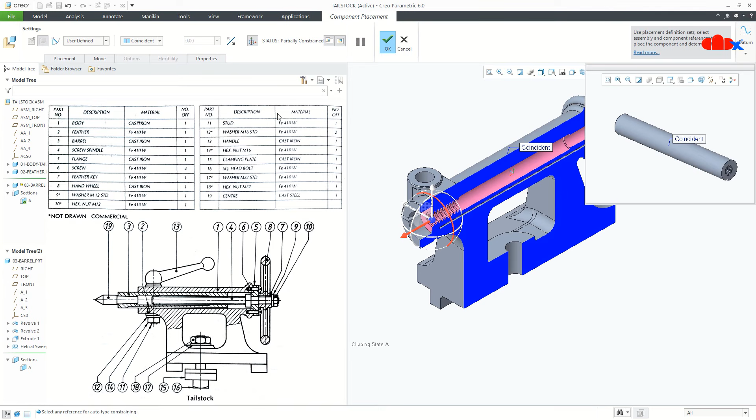Now the third part, which is barrel, which comes somewhere here. So go to assemble, select the third part. Now select this surface with this surface and flip it. Now from this surface to this surface, make it distance, and the value will be 38. Then go to placement and uncheck allow assumptions. Select third constraint, then select this surface to the side surface. Now make this parallel and say OK. So your third part is done.

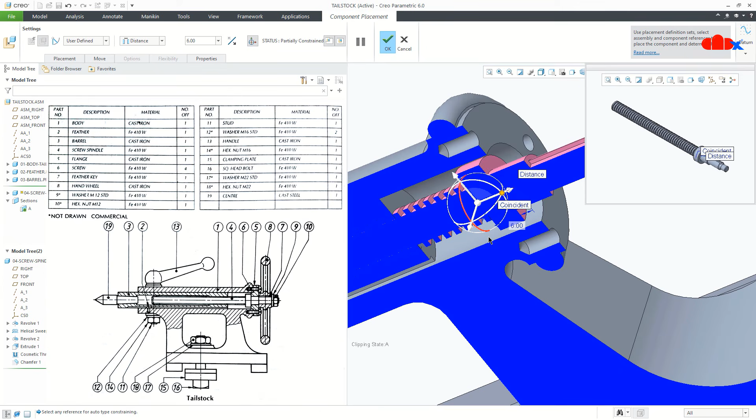Now the fourth part, which is screw spindle, which comes somewhere here. So go to assemble, select the fourth part, select this surface with this body surface, this also you flip. Now drag it to this side, then from this surface to this surface, make it distance, and the distance value is 6. Now select this surface to the side surface. This is the third constraint, and this should be parallel, and say OK. So your fourth part is done. Now you can clearly see how nicely the threads are sitting with each other.

Now the fifth part, which is flange, which comes somewhere here. So go to assemble, select the fifth part, now select this surface with this surface, then this surface should sit on this surface. Now this you make coincident, then go for the third constraint, and select this hole with this hole, say OK, and your fifth part is done.

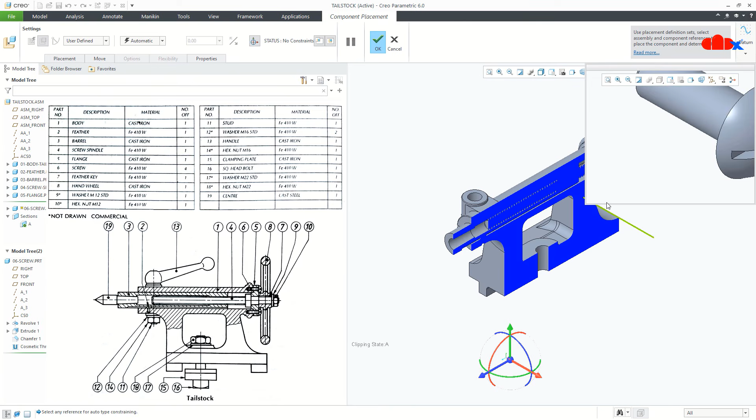Now the sixth part, which is screw, which comes here. So go to assemble, select the sixth part, now select this surface with this surface and this surface with this surface. Now go to placement and select allow assumptions, because this part is the same all around, so no need to add the third constraint. Now select the part and go for pattern, and your screw is patterned.

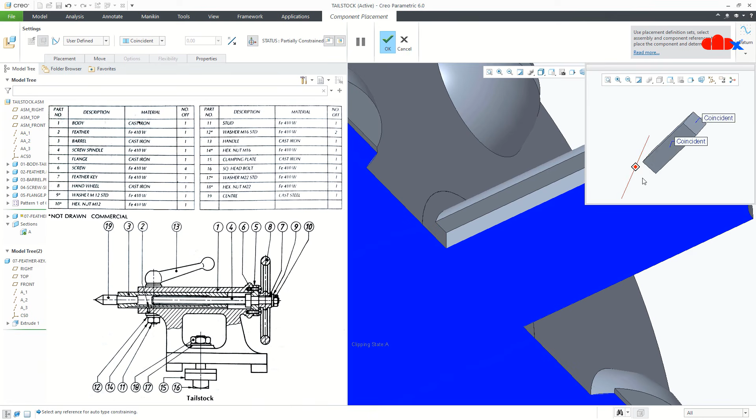Now the seventh part, which is feather key, which comes here to engage wheel with the spindle. Go to assemble and select the next part. Now select this surface with this surface, this should be coincident. Then this surface with this surface, this is also coincident. Then this surface with this side surface, this is also coincident. And say OK, and this part is also done.

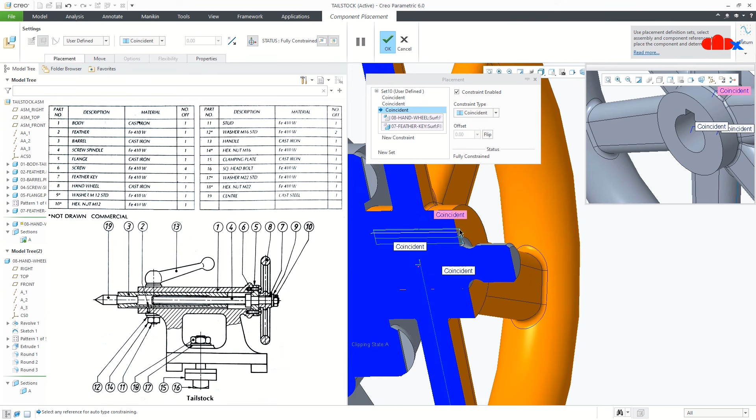Now the eighth part, which is hand wheel, which comes somewhere here. So go to assemble, select hand wheel, now select this surface with this surface, then this surface with this surface. Make it coincident. Now go to placement, uncheck allow assumption and add the third constraint, which is this side surface with the key side surface. And say OK, so this part is also done.

Now the next part, which is fasteners. So go to assemble, select M12 washer, then select this surface to this surface and this surface to this surface. Make it coincident. Now go for placement and select allow assumptions, because this part is all around same, so no need to have the third constraint. Now go to assemble and select M12 nut, and in the same way assemble this part also. Make it coincident and say OK. So your M12 washer and nut is assembled.

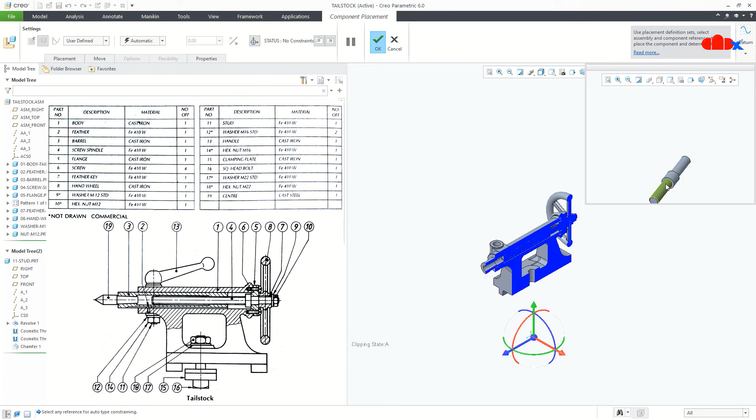Now the next part is stud, the 11th part, which is coming here. So go to assemble, select the stud, now select this surface with this cylindrical surface, and then this surface with this surface. Now make it coincident and say OK, because this part is also all around same, so no need to have the third constraint.

Now the next part is the washer. So go to the assemble, select M16 washer, select this surface with this surface and this surface with this surface. Make it coincident and say OK. Now the next part is the nut, M16 nut. So select this part, select this surface with this surface and this surface with this surface and say OK. So M16 nut and washer is done.

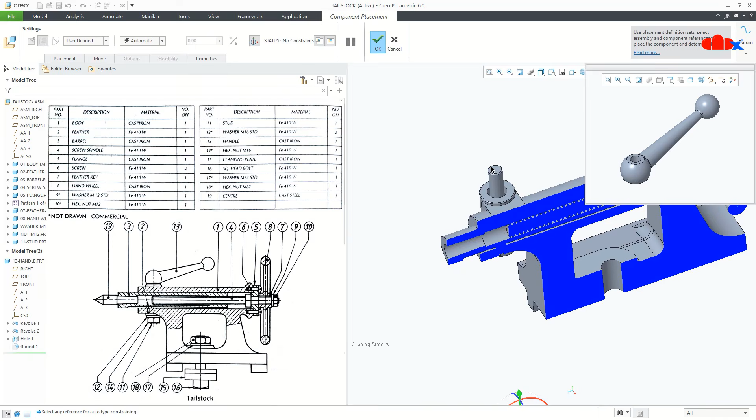Now the next part is handle, which is this one. So go to assemble, select handle. Now select this surface with this surface and this bottom surface with this surface. Make it coincident and say OK.

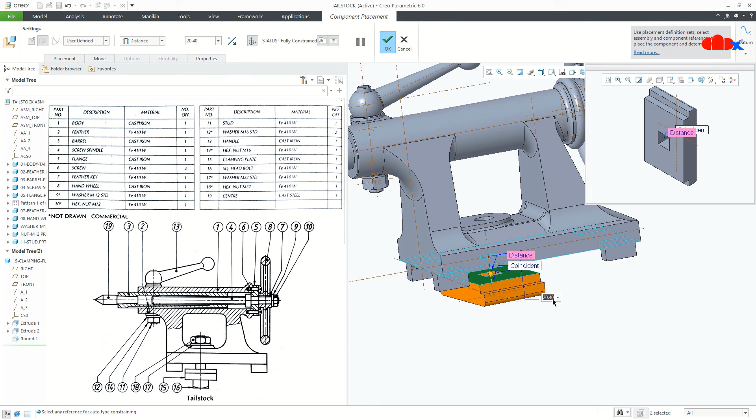Now the next part is clamping plate, which is coming here. So go to assemble, select the clamping plate. You can rotate this part like this. Now first you switch on the datum axis. Now using this axis, you assemble with this axis, make it coincident. Then this surface with this bottom surface, make it distance and the value will be 20.40. Now go to the placement and uncheck allow assumption, then go for third constraint and select this surface with this surface. Make it parallel and say OK. So this part is also done.

Now the next part is the square headed bolt, which is this bolt. So go to the assemble, select square head bolt. Then from this surface to this surface, flip it. Then from this surface to this surface and from this surface to this bottom surface. Make it coincident and say OK. So this is also done.

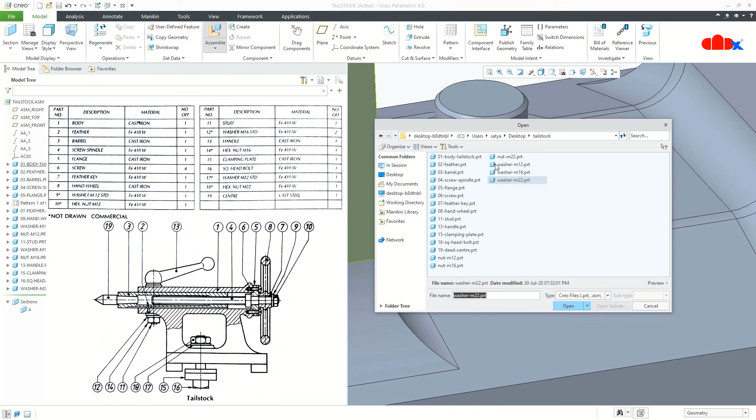Now the next part is the fastener. So go to the assemble, select M22 washer, then this surface to this surface and this bottom surface to this surface. Go to placement, select allow assumption and say OK. Similarly, the M22 nut. So from this surface to this surface and this surface to this surface. Make it coincident and say OK.

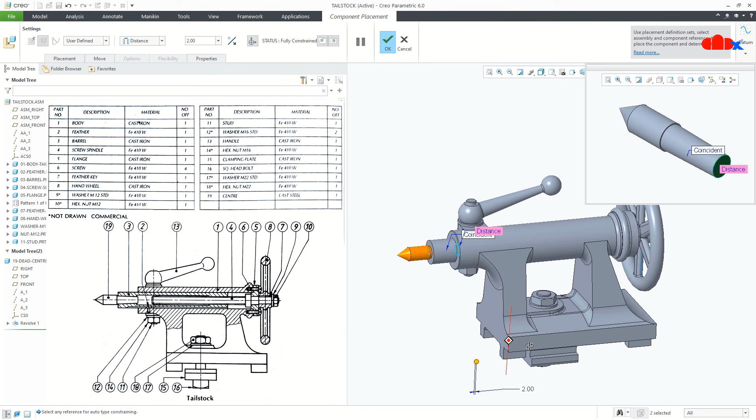Now the last part is the dead center, which is this part. So go to assemble, select the dead center. Now select this surface with this surface. Drag it outside. Now from this back surface to this surface, you just right click there and you will find that surface. Now flip this direction and this one you make it 2, and say OK. So all the parts are assembled.

Now I'll edit this section view. I'll go to models, exclude selected models, and I'll select this model, this model, this model, this nut and washer, this nut and washer, and I'll say OK. So you need to select all these parts by pressing and holding Control key, and your section view got updated. So your assembly is completely done.